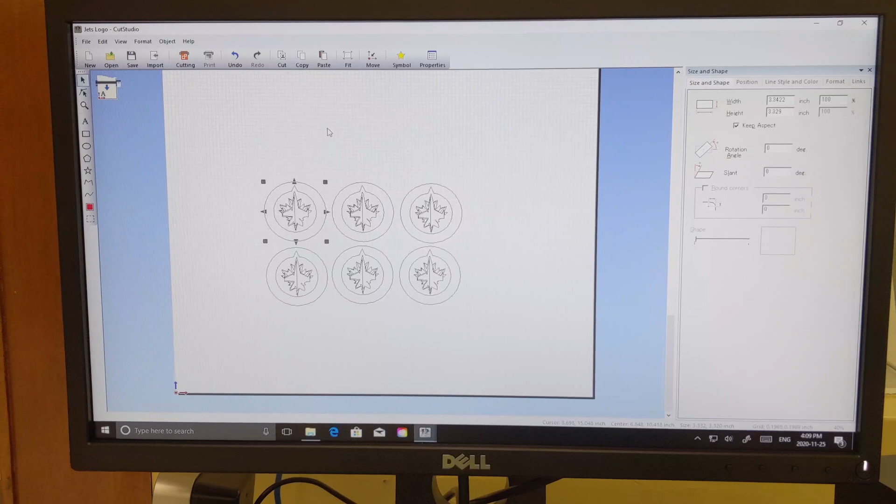Your first step is to make sure you move your design to the corner, which is move to origin. As you can see here, my logo is very small, only about 3.3 by 3.3. So I copied and pasted and made a few more logos so that when I cut out my vinyl piece, I'm not cutting out a tiny little vinyl piece. So I'm going to select all.

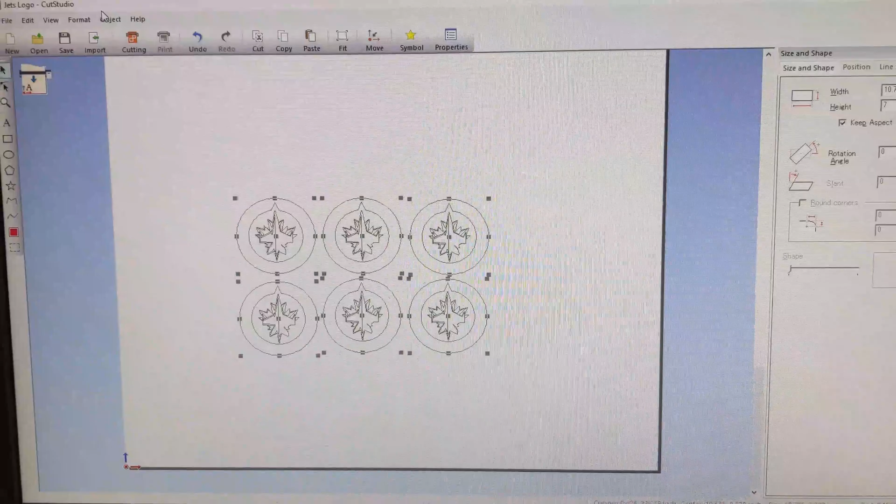I'm going to go to Object, Group, and then group these guys all together. And now you can see that my design has become bigger, 10.7 by 7 inches. Now I'm going to click Move, and it's going to snap right to the corner there.

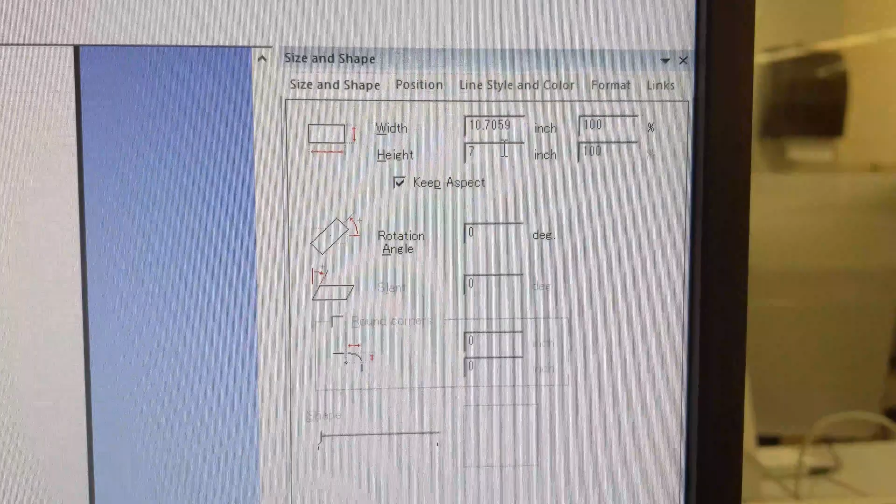My next step here is to cut a vinyl piece that is 2 inches wider and 2 inches higher than these marks. So if it's 10.7, I want a piece that's 12.7. If the height is 7 inches, I want a piece that's 9 inches tall. So your next step is to cut that vinyl piece bigger than your design.

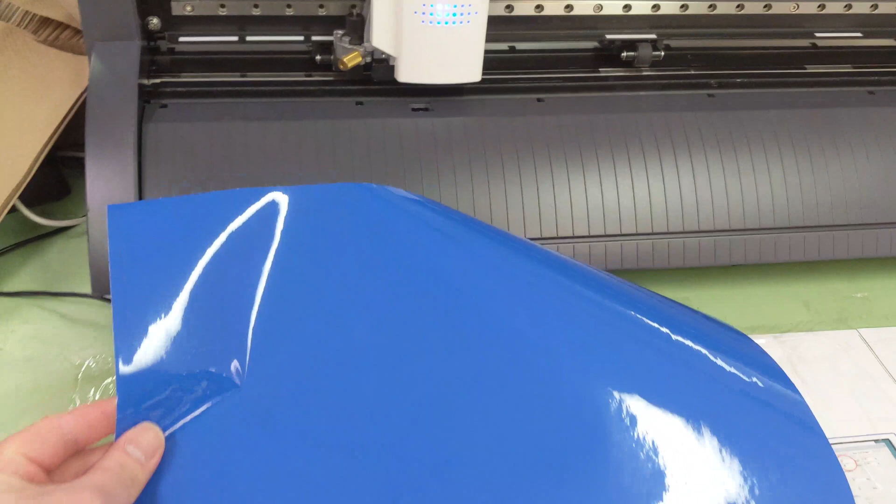So here I have a piece that is much bigger than my design, but we want to make sure the vinyl cutter will see that this piece is bigger than your design. So we're going to load this vinyl into the vinyl cutter and measure the size of it with the vinyl cutter now. Alright, this is the cutter head here with the blade in it.

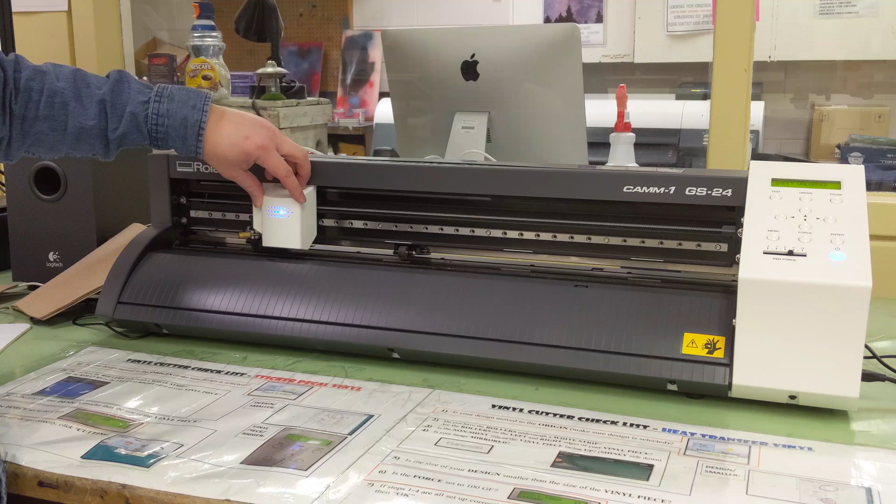If it's in the middle of the vinyl cutter, you just have to press the right arrow to move it back to the right. Then you're going to take your vinyl piece, and when you load it, you want the rollers at the edges, the right edge and the left edge of your vinyl piece. The rollers also need to be underneath one of these white strips.

So what I like to do is line up my piece and see if the edge of the paper or vinyl will rest underneath the white strip. Since it rests under this white strip and this white strip, that's where I'm going to put the rollers. So I have both rollers placed under a white strip and they're at the edges of my vinyl piece.

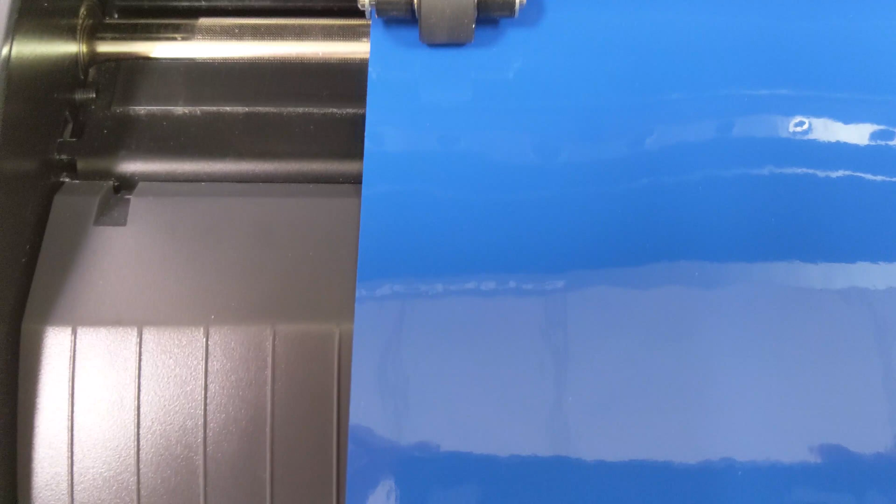I'm now going to use this lever at the back here to lock down the roller. Now my vinyl piece is in there, and then we need to select the sheet. This is just a close-up of what it should look like. As you can see, the rollers are close to the edge and underneath a white strip, and the other one is also to the edge and underneath a white strip.

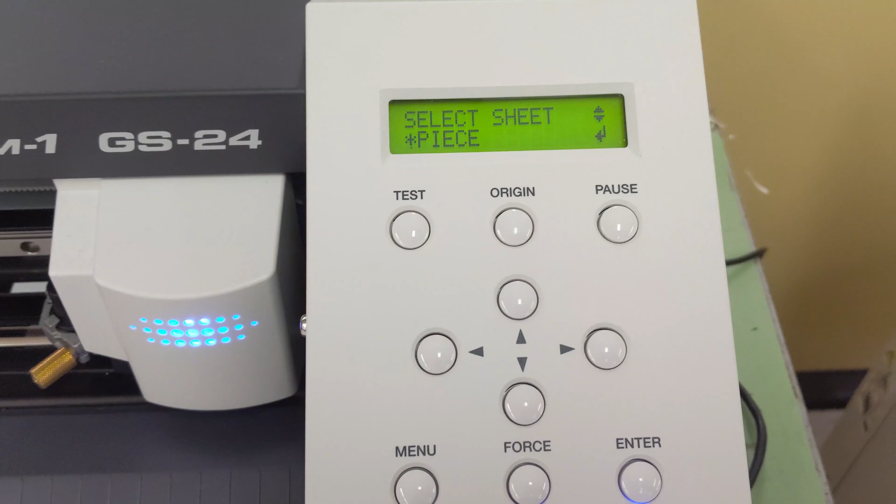So as you can see on the screen, it says Select Sheet Roll. My vinyl piece is not on a roll, we cut it off of the roll. So I'm going to choose the options here. You can use the up and down key, and you have piece, you also have edge, and then you go back to roll. We want to be on Select Sheet Piece because we're on a piece of vinyl, and then we're going to press Enter.

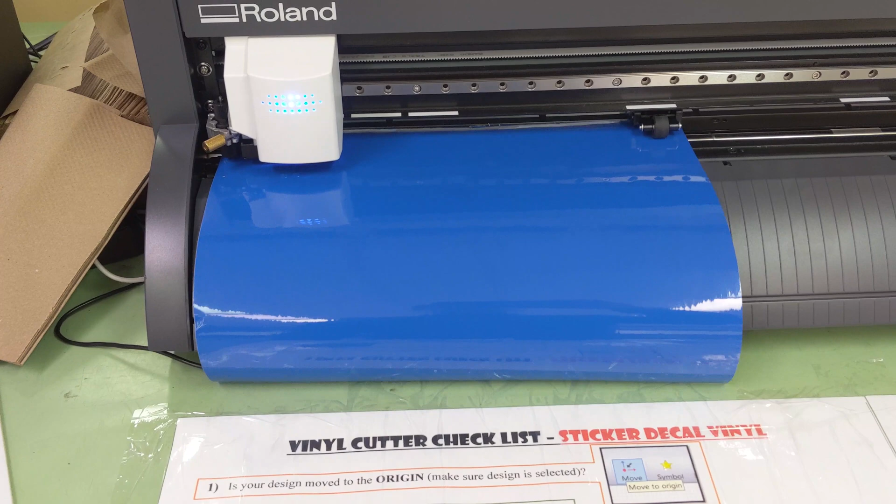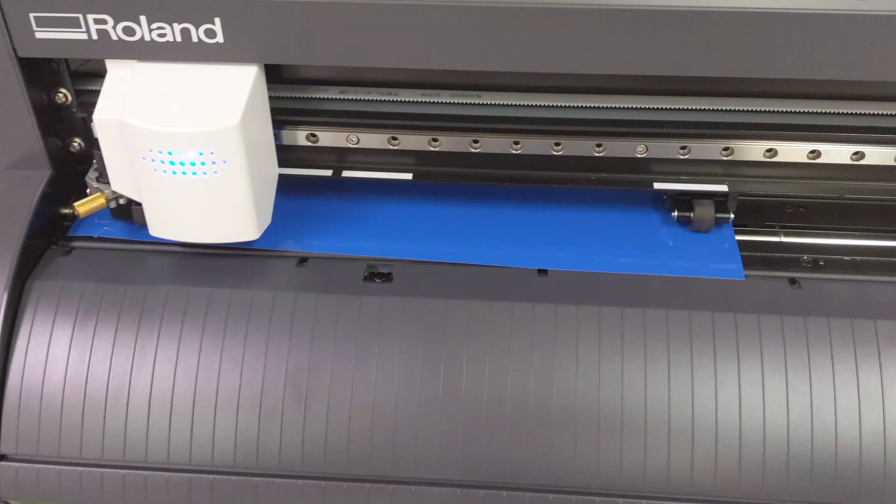And now my vinyl cutter is going to measure the size of this vinyl piece. Nice. And now we're going to go back to our screen and it gives us dimensions. This vinyl piece is 11.2 inches by 8 inches. We're going to go to our design and make sure those numbers are smaller than the numbers on our vinyl cutter, and as you can see, they are. This is 10.7 by 7 and our vinyl piece is 11.2 by 8, meaning our vinyl piece is bigger than our design.

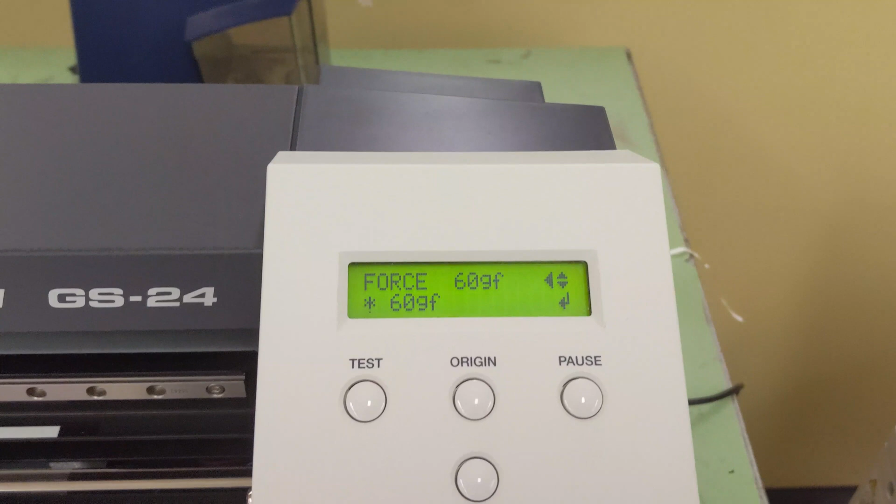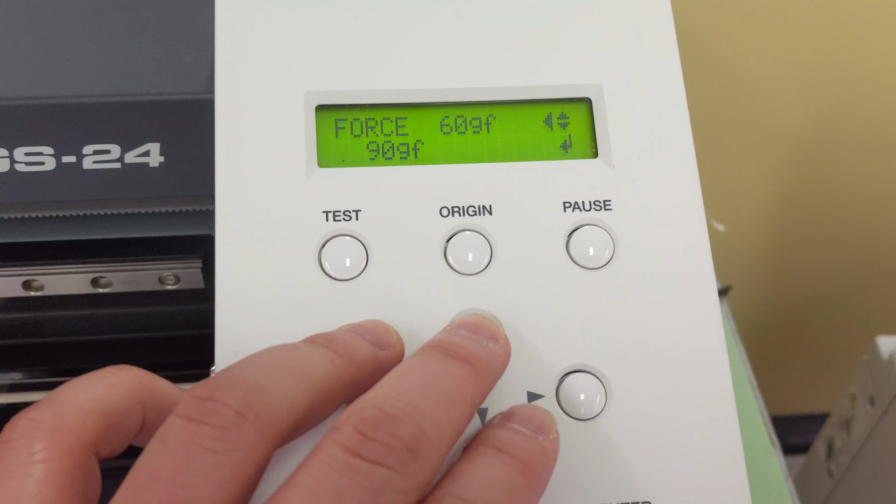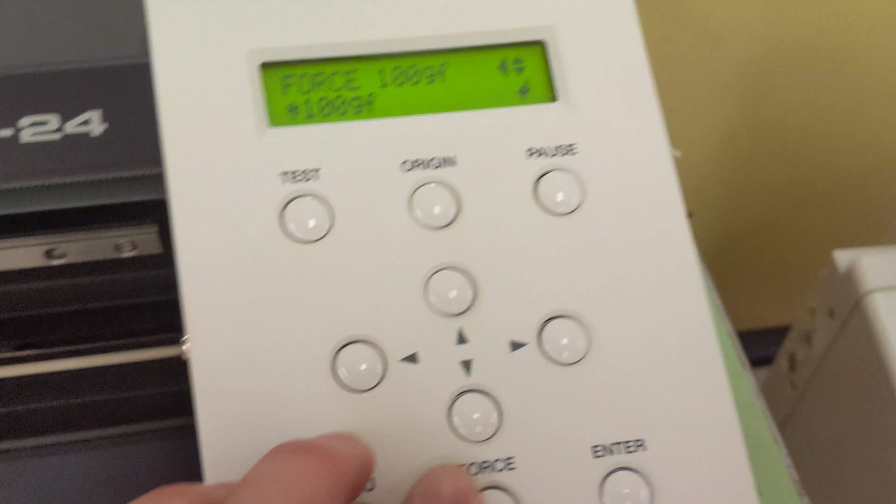The last thing you want to check is the force. So you can click force here, and for the sticker decal, it's usually 60 grams that we would want. For heat transfer vinyl, you want it at 100, so you can use the up arrow key to set it to 100, then press enter to change the force to 100 grams. But since this is vinyl decal, I'm going to go back to force and bring it down to 60, and press enter.

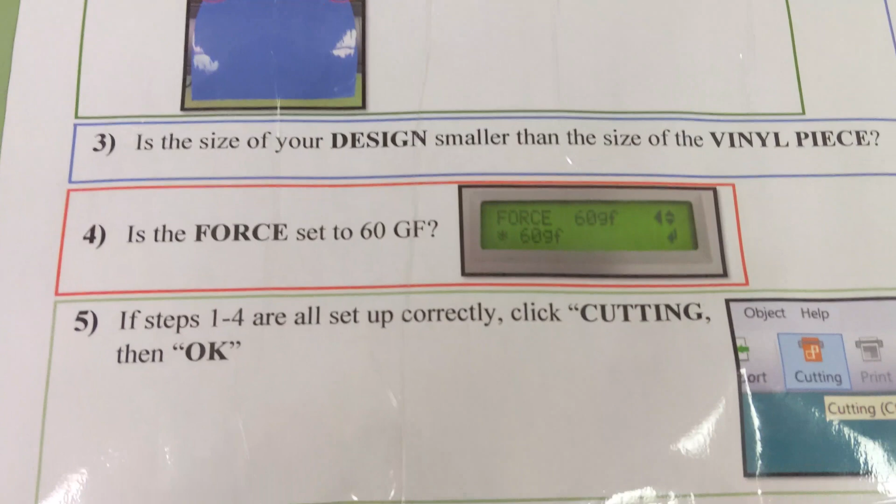Once you've done all 4 steps here, your next step is to click cutting, then click OK, and watch your design cut away onto your vinyl. And that's it.

I guess I should probably mention that once it's done cutting, the cutter head will stop moving. You can just release the lever and then take out your vinyl piece, and you can see kind of how your design is cut into the vinyl now.

Afterwards, please press the power button and turn it off.